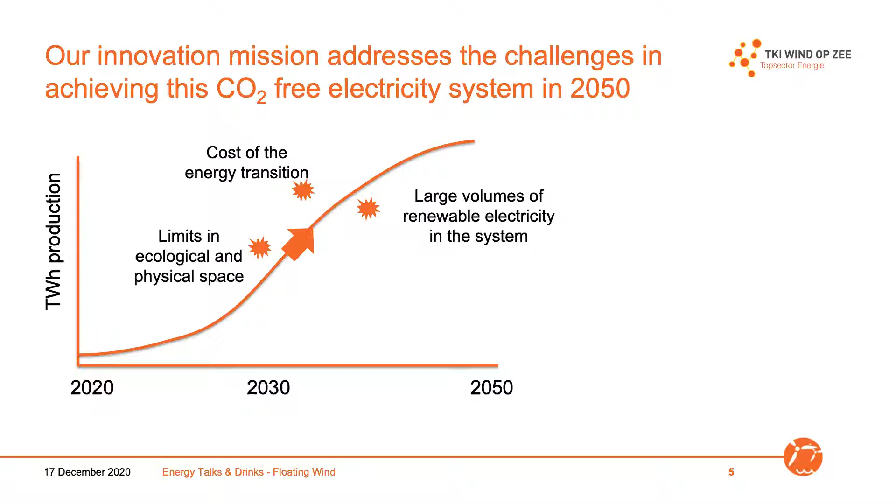A third area is, of course, space. Space is limited, both from an ecological viewpoint, but also from a usage viewpoint. So these three areas are the core of our innovation program. For all these three topics, we have separate innovation themes or subjects that we address. For tonight, the balance of plant, as we call it, is the relevant topic. For the Dutch energy transition, bottom fixed is a likely solution. It's available and cheap at the moment. But we also see for the longer term that new foundation concepts, including floating, also for shallower waters, could be a very interesting solution. It can also reduce, for example, the cost of installation, potentially also maintenance cost.

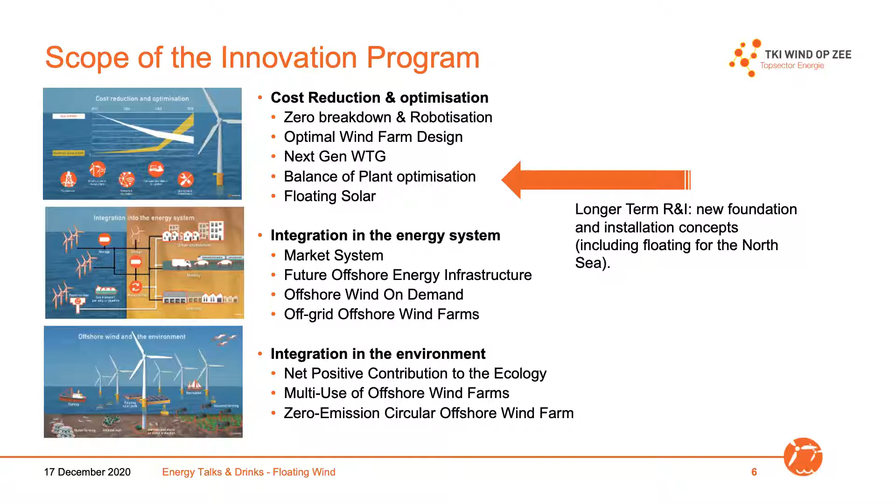So for the longer term, we see the perspective also of floating offshore wind in the North Sea. But of course, these are very shallow waters. Now, floating offshore wind is, of course, a much bigger subject than the Dutch energy transition.

What is it? 2 weeks ago, the European Commission launched their EU offshore renewable energy strategy, which includes a 300 gigawatt target for 2050 in offshore wind. But explicitly, floating offshore wind is mentioned as a key technology for areas like the Atlantic, the Mediterranean, but also the Black Sea. And I think we're very much encouraged by these statements from the European Commission that we are working towards these kind of targets.

So a mix of bottom fixed and floating offshore wind in the long run. But there's still a couple of steps to be set in that area before we come to a full scale up of floating offshore wind.

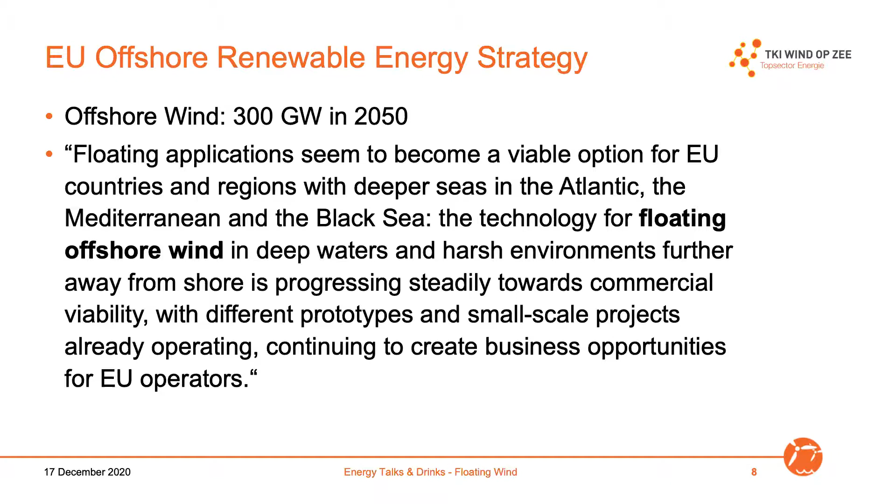Also part of that publication from the European Commission, this is the current situation. On the right-hand side, you see offshore wind, roughly 12 gigawatts of installed capacity at this moment, and 40 megawatts of floating offshore wind. But it is in the most promising stages of all the other technologies that also are on the roadmap for our energy transition.

And the last session for the Energy Talks and Drinks, we had about floating PV. So that is really starting to say in the lower TRL levels. But floating offshore wind, yeah, we have already projects operational right now. So we're way ahead there.

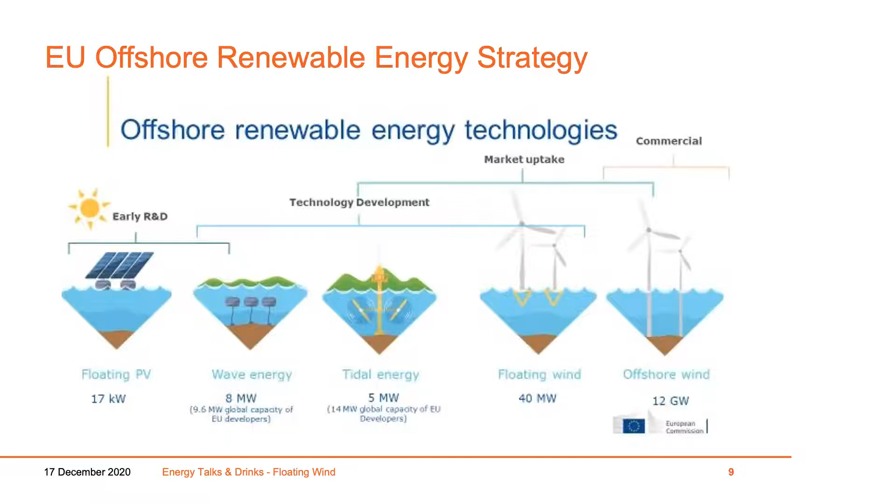So what I'd like to do now is to introduce to you Sarah Marshall, who's a principal engineer at Atkins, a well-known engineering company, and she'll say a few things about the challenges also for global offshore wind developments. Well, I'll stop sharing my screen and I'd like to hand over to Sarah.

Hello, everyone, and thank you for the introduction, Bob, and the kind words. Yeah, so I don't have any presentation slides for you. I just wanted to talk to you about the general opportunities and challenges associated with floating offshore wind.

So a bit of background about me. My background is in installation and transportation of these structures, and I've been working with floating offshore wind projects for the last 5 years and fixed offshore projects in the wind industry many years before that. And I'm really seeing the different challenges that we're getting between the different industries. And one of the things that I'm focusing on is actually changing the way we look at the design of the structures, because it's being driven much more by the installation criteria.

So Bob mentioned earlier about the applications in shallower waters, but going further out with greater energy yield in deeper waters. That's absolutely where we want to be going for the floating offshore wind capacity. But I also see there's a massive application in shallower water places, mainly because if you've got really challenging geological seabed conditions, you can actually install a floating offshore wind farm at a much reduced cost to a fixed structure. So there's opportunities for that.

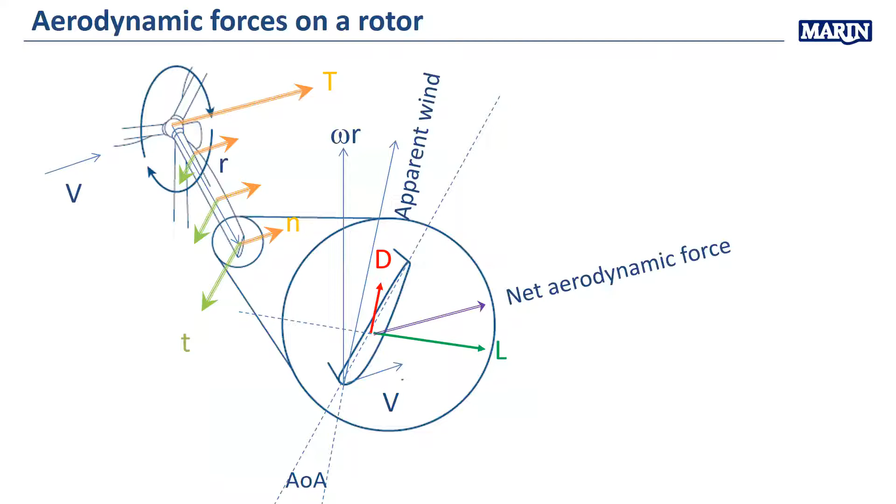if we think of a section of a blade, we are generating lift and drag forces, which are based on the composition of the incoming wind speed and the rotational speed of the blade. This is summed up along the blade, and we have a torque, which is useful for the generation of power, and a thrust. But this thrust needs to be taken into account in the overall dynamics, because it's really adding another character to the game. So floating offshore wind turbines are not like oil and gas platforms that are merely excited by waves, but we have to consider the dynamic contribution of wind.

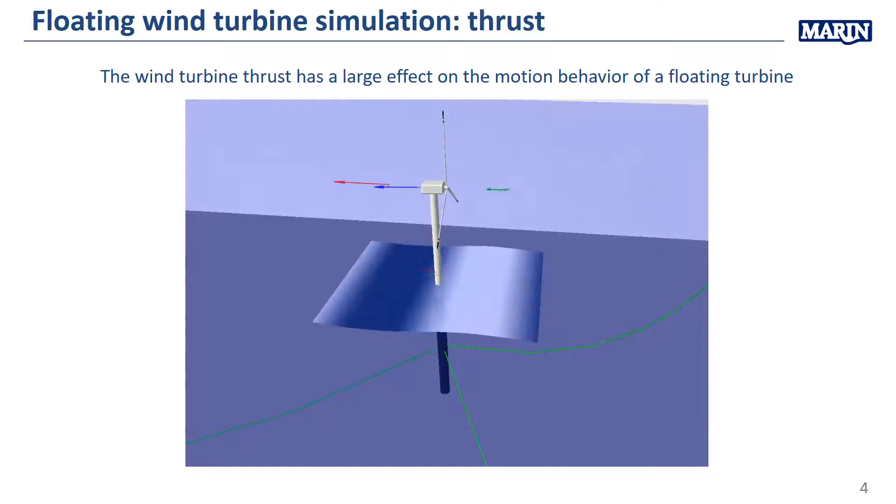And we can do that by developing and validating new numerical codes that need to include a lot of different and new challenges from an engineering and also an IT perspective. These codes are basically the tools that the offshore wind industry needs to base their design upon. But these codes need to be validated. And this can be validated in facilities like MARIN, which is at the top rank of facilities and institutes like this.

We have big facilities, big wave makers, and a big basin where we can reproduce the wind, but specifically wave conditions, and we can actually test scale models. So if you can see from this picture, basically what you have is a very tiny scale model, 1 to 50. This is the scale that is generally related to floating wind turbines, in a very huge facility.

I'm stressing this concept of the dimension of the facility, because this becomes really important when we also put wind in this facility, in order to have as little blockage effect as possible, and as little dependency as possible on the geometry surrounding the wind turbine model. We need very big spaces, and at MARIN, fortunately, we are in a very good position compared to other facilities to be able to create these conditions.

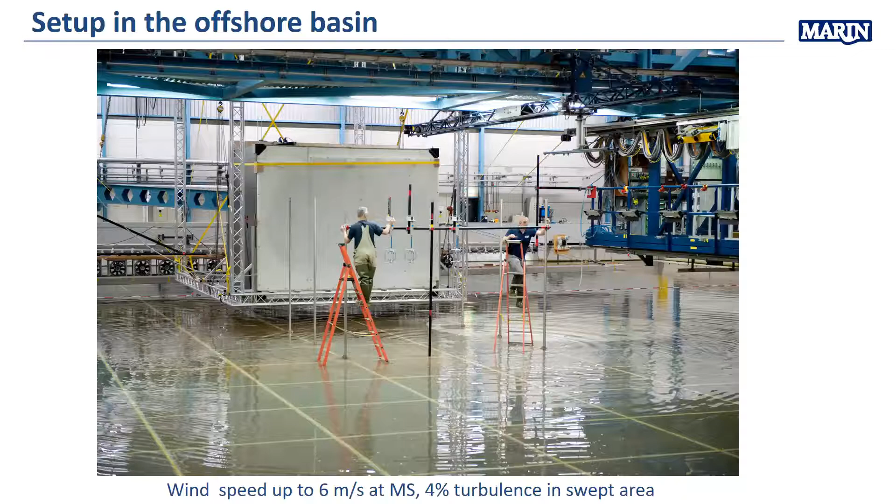Just to give you an example, here is a picture related to the installation and the wind calibration, because what we need to do beforehand, before putting the model into water, is making sure that the wind field is reproducing the characteristics of the wind site. The met-ocean conditions are basically the key point for us to build from scratch an effective test campaign. To do so, of course, waves need to be calibrated specifically and independently on the wind of the installation site, but also the quality of wind is a key point.

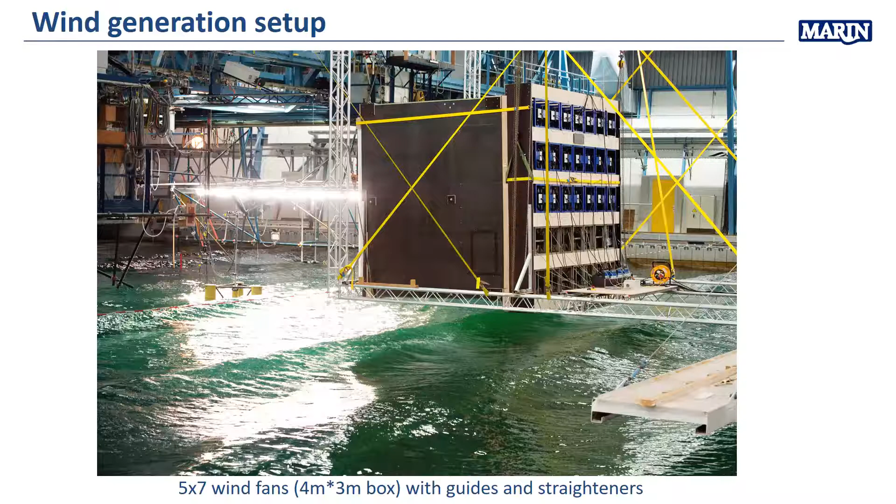And for doing that, we have developed this set of fans that allows us to basically have two different facilities in one: a high quality wind tunnel coupled with a high quality wave basin. And this, I have to admit, is quite unique in the world, and it's in the Netherlands.

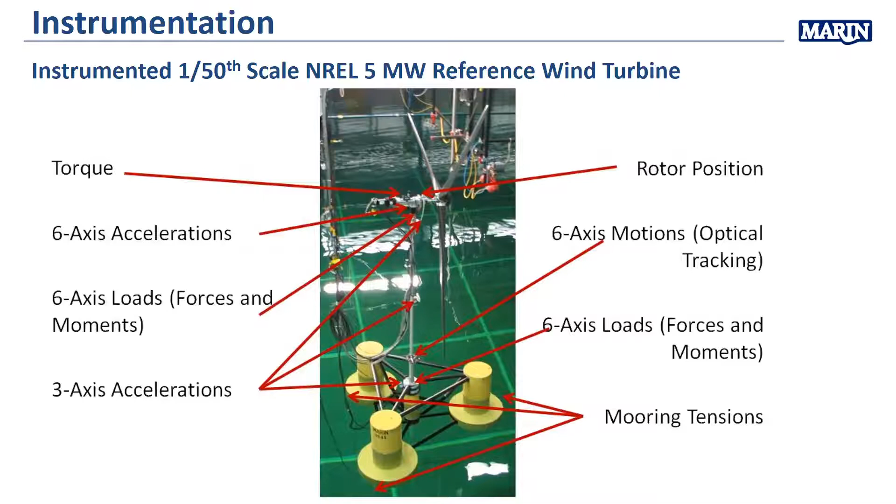And this is how it looks like. We want to put a lot of sensors, without going into details, sensors that allow us to gather measurements in operating conditions to validate the numerical codes that we have mentioned that are being used by industry. So we place force sensors, displacement sensors, accelerometers all over, or in a smart position, depending on what is the research question of the test campaign.

You can see here a close look at how a scale model of a wind turbine looks like. And I have to admit that at MARIN, fortunately, we have the engineering and manufacturing capability to produce quite high quality scale models of wind turbines, because it's key, especially if we consider how much influence the quality of the blade, which I'm going to talk about briefly, and the dynamics of the control system have, for example, on the overall dynamics of the platform.

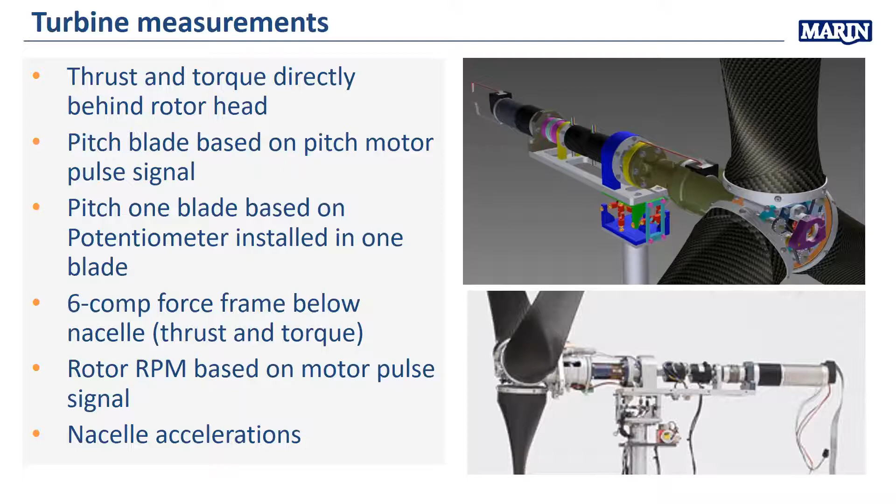Typically, our clients are oil and gas platform manufacturers that are going into floating wind, and this kind of campaign is useful for them to fine-tune their design in order to be aware of what are the stresses, the motions, the forces on the mooring system and on the platform itself, and the loading coming from the static and dynamic forces of the wind turbine are key in the overall design.

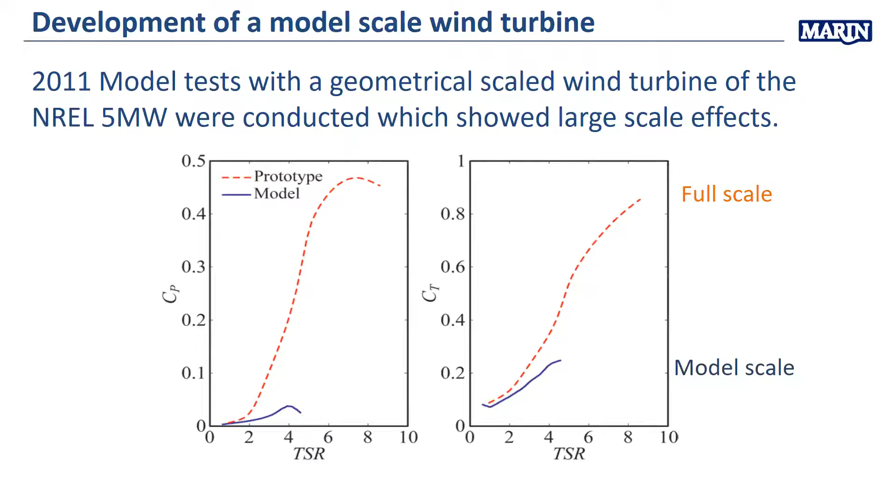But talking about this, it looks like a very simple task, but this is not the case. If we look at these two graphs, one might say, okay, you have the curves of the power and thrust coefficient that you want to reproduce at model scale, but they are actually quite different compared to the performance of the model scale. That is true, but only if we just scale down geometrically the wind turbine blade design. What you actually want to do is reproduce the same forces in a scaled manner.

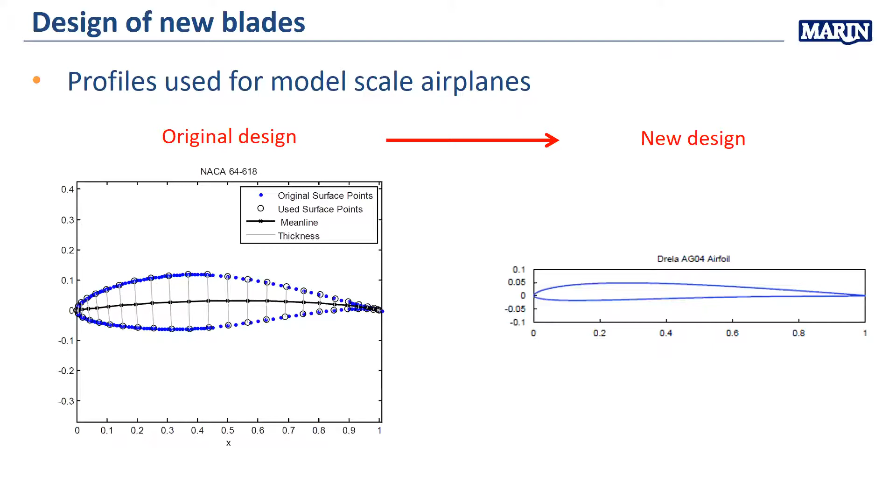So what you have to do is completely get rid of the full scale design, and redesign as if you were a wind turbine manufacturer, specifically for the scale model performance of your wind turbine. That's the only way that you can match the two curves. This sounds a little bit technical, but long story short, you have to reproduce some kind of equivalent design of the rotor at model scale in order to be able to reproduce the full scale performance.

And we can do that thanks to our long-lasting experience in propellers. In the end, a wind turbine is not that different from a propeller, and we can make use of numerical codes that have been validated for decades.

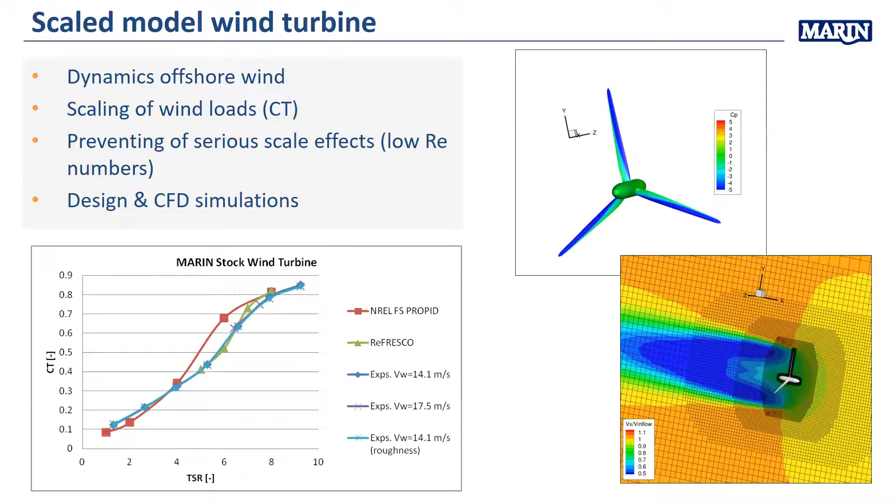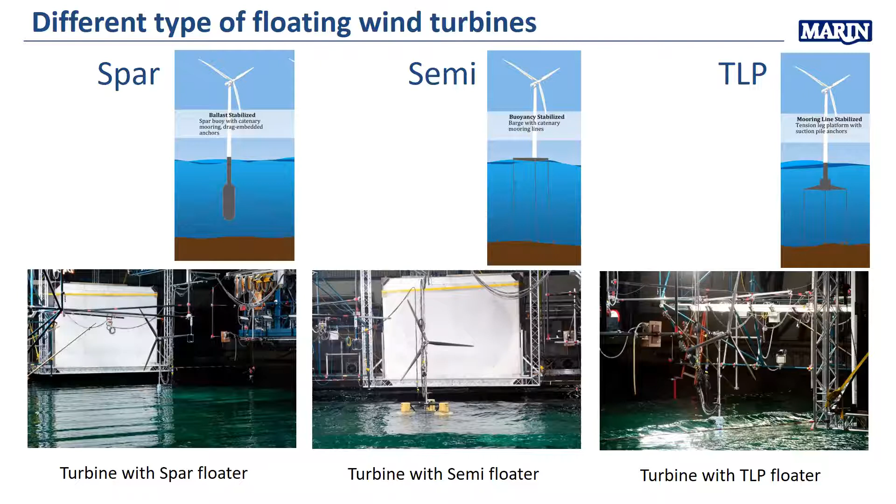So here in the oil and gas approach, let's say oil and gas manufacturers, they are designing their platform and they are trying to make that as cheap as possible. The other type of concept is considering from the very beginning of the design also the O&M and the transportation issues. So then, considering those constraints as inputs, you come up with some design that can look completely different compared to this type of concept.

We have been testing different concepts for more than one decade, and these are the typical testing campaign results of our previous experience. As you can see, these are different concepts for these different applications, and they show different behavior in almost comparable wave and wind loading conditions.

For example, just to mention one, the spar on the left is really acting like a pendulum. So it's rotating back and forth quite a lot without moving transversely too much. Whereas on the other side, you can see the TLP, which is very stiffly connected, and so it pitches really low compared to the other concept.

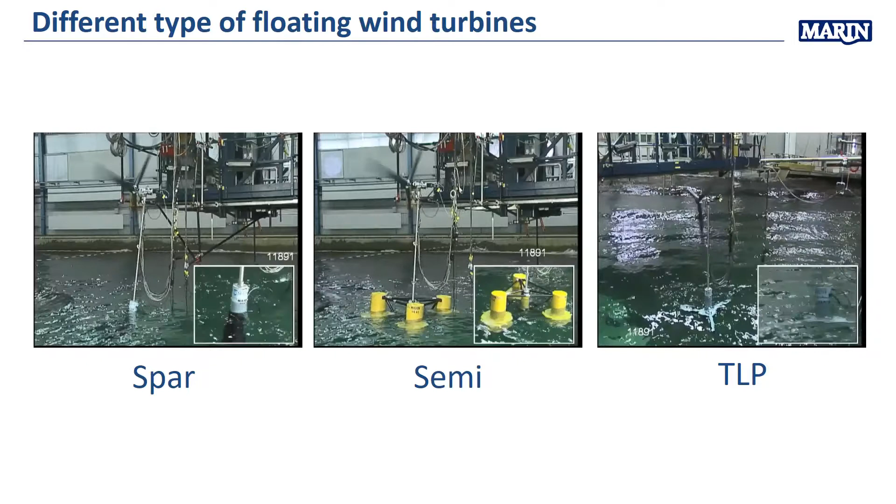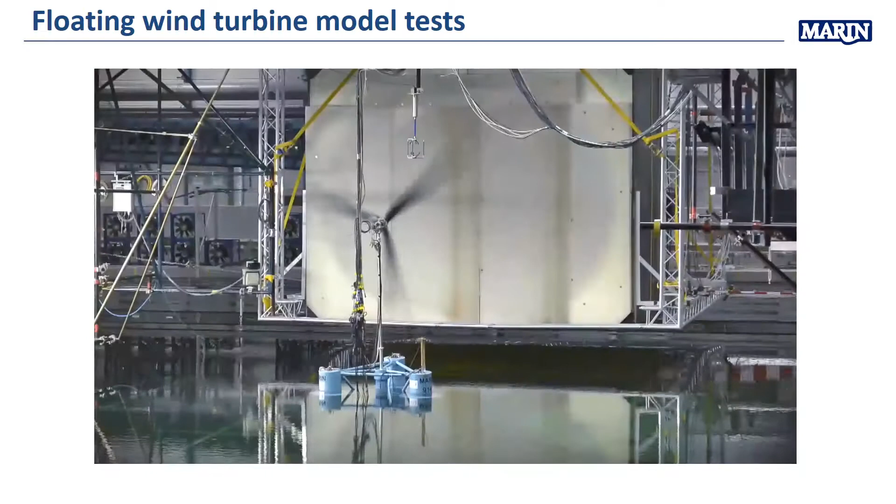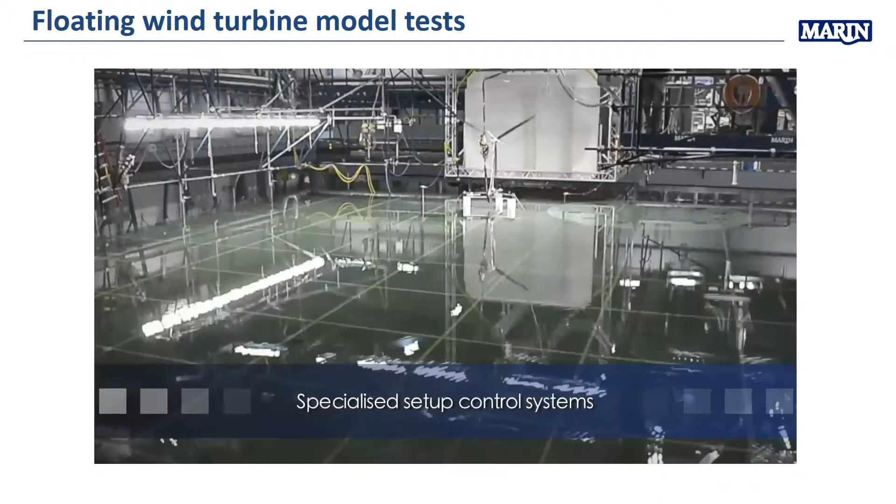This is a typical offshore basin experiment. This is a little bit promotional, but I think it can give the idea of what testing floating wind turbines looks like. From the control room, we are able to control everything that is related to the control of the wind turbine itself and the generation of the wind and the waves.

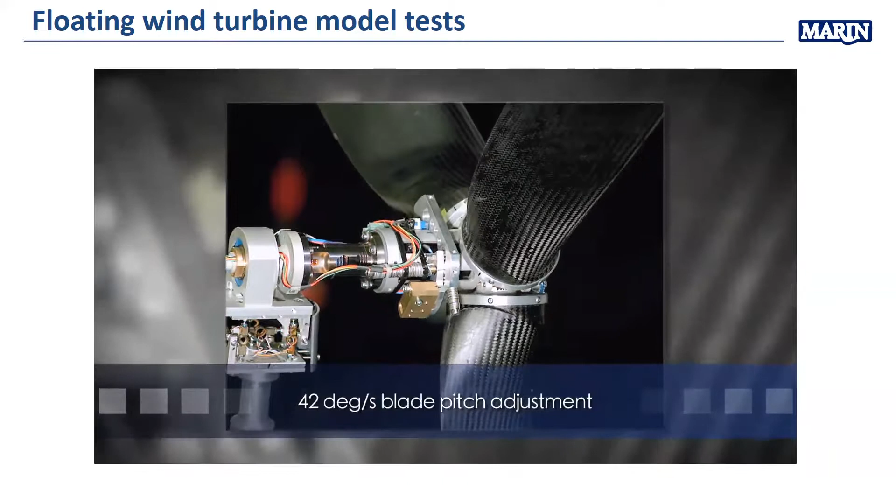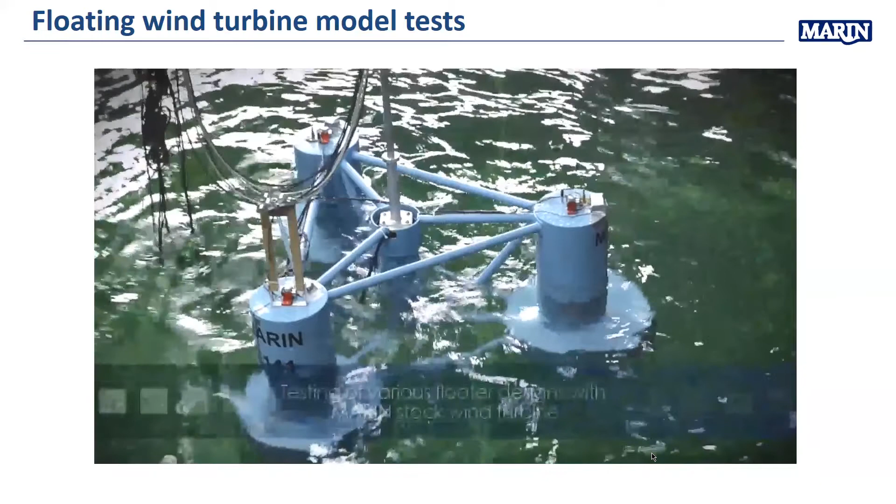And as you can see here, the mechanism behind the performance of the rotor is quite important for the overall performance, so we are able to dedicate quite some precision to details. It's almost done. Here we have a few concepts from a platform manufacturer that you might know. And just to give you an idea, the typical scale is 50.

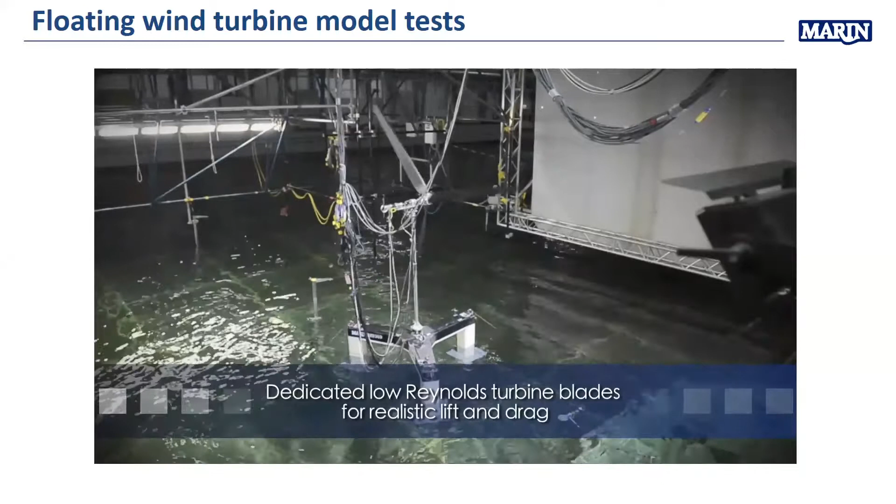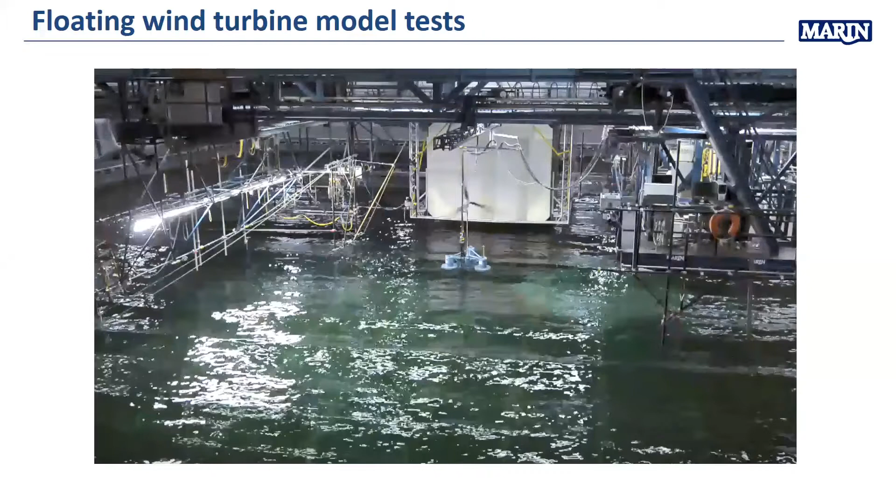So the Froude scaling, which is basically the way we are scaling down the forces and the motions, is more or less 1 to 7 for the wind velocity. So it means that we are actually able to reproduce up to more or less 6 meters per second in the basin, which means way beyond the cutoff of the wind turbine.

Just briefly, I want to show you the last update of our research. This can be considered as the research of the research. So we at MARIN are doing research in order to make the research of our clients most effective.

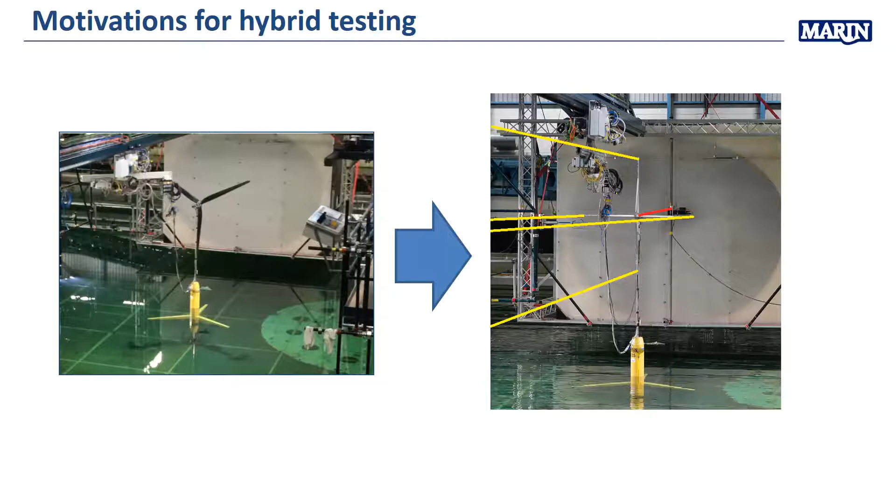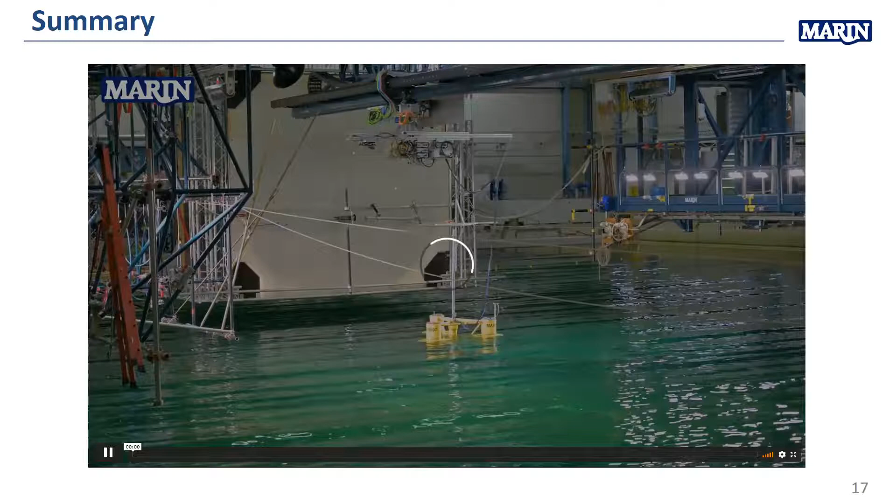And just this very final movie, which is a promotional one, but at least gives you the idea of the two different setups, with winches and with a physical rotor, that are available at MARIN, depending on the goal.

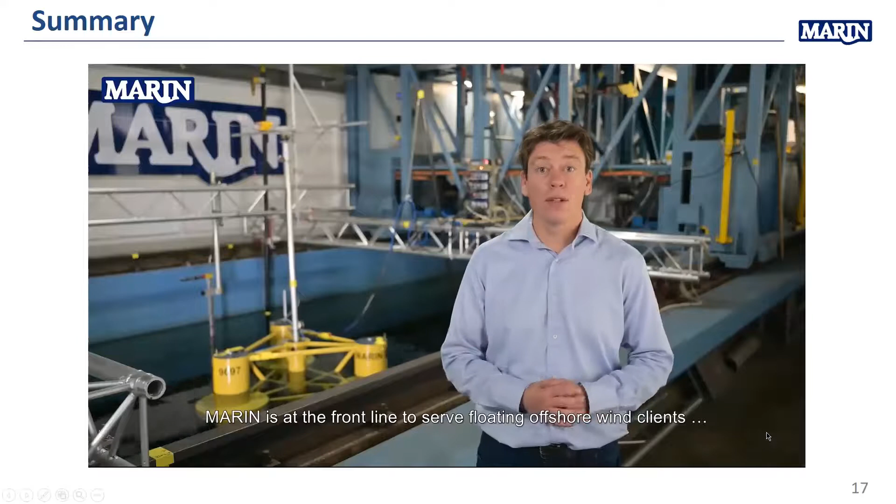As offshore wind energy is growing and moving into the ocean, MARIN is at the front line to serve floating offshore wind clients at key stages of the project life cycle, from concept to commercial operation.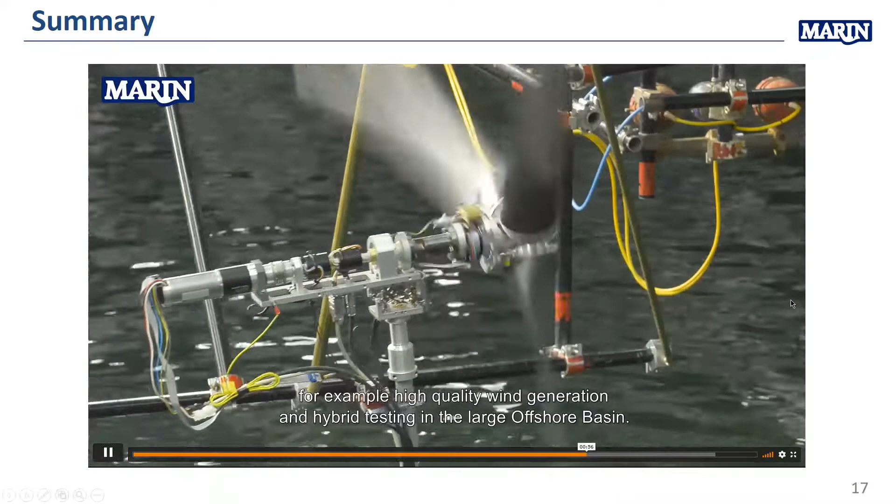Okay, that was a little bit promotional, but I think it was nice to see. Thanks, that was the end of my presentation. And just three quick remarks.

What I think is important is that model tests, as has been mentioned, are complementary, but also really important to be combined with simulations. At MARIN, we have capabilities to help our clients do both. And we always tell our clients that investing in a scale model test campaign reduces the risk quite a lot, optimizes the design, and in terms of cost it's absolutely not comparable with what can happen with the wrong design at sea. So feel free to reach out if you have any questions.

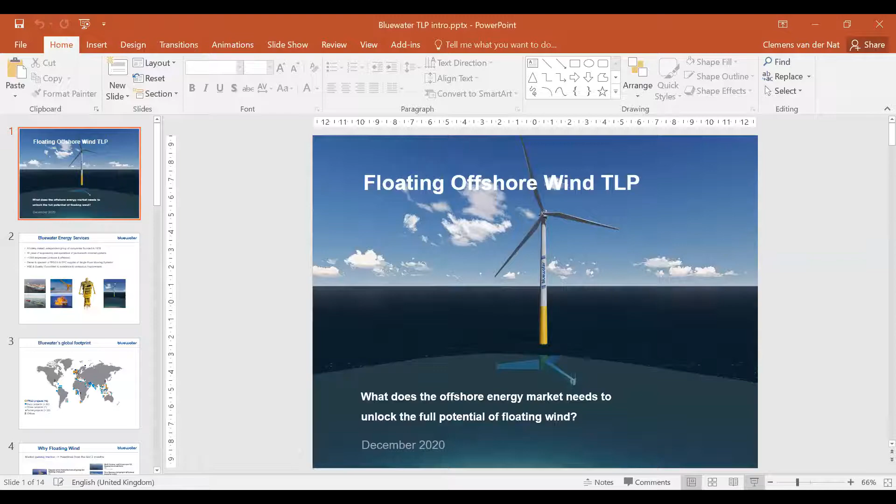Well, I will tell something about quite a different subject, where we see that there are needs for this new offshore market, needs that can unlock the potential of floating wind. Actually, the previous speakers were already talking a lot about the floating wind market, but our view on that market is different. So I hope it also gives some discussion with the previous speakers.

I liked seeing the motions of the TLP in the basin, which shows that they are very minimal compared to the others. That is certainly true. You also showed the hybrid testing in the basin with the winches from our TLP. It was necessary because the wind loads, even if the turbine is not spinning and you are offshore the northern part of Scotland, are so high that you cannot generate them with the wind machines. So you have to do that with the winches. So it was good to see that is necessary.

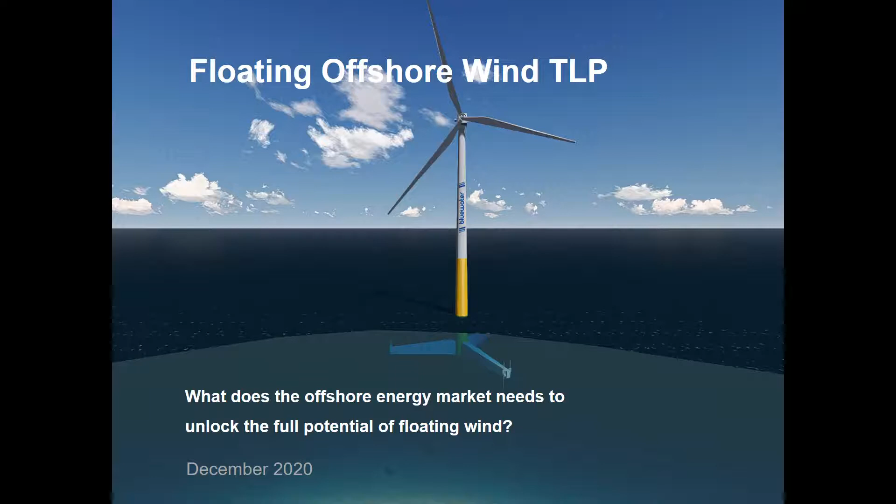Well, I will tell something else. I will go to the next slide. Just a little bit about Bluewater, where we're coming from. Not everyone may know that we are in the business of oil and gas. Our background is mooring of oil and gas facilities, big turret projects, also in the Arctic, and FPSOs. And for 5 years already, we have been working on floating wind.

It's been actually a challenge. There are a lot of challenges in floating wind. Not only, let's say, the numerical side, which has been discussed already a bit, but also the market for floating wind is quite challenging because you need to demonstrate in order to have an entry ticket. And that is a very expensive ticket because these demonstration projects are really expensive.

And that's also one of the reasons why I think there are very few demonstrators out there at the moment. And of course, all these people that have demonstrated want no one else in the market anymore. So they will tell everyone that demonstration has been done and that we have to move to the commercial side, which we of course agree with, but I think there are also other reasons why they say so.

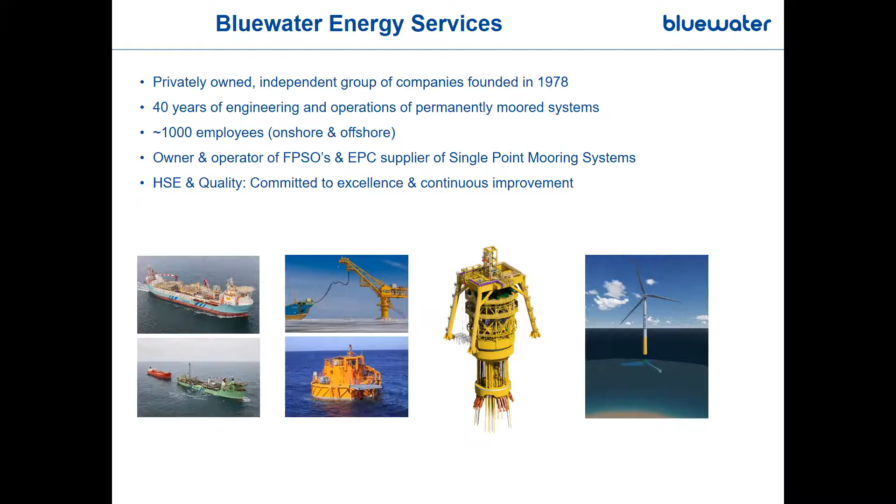Yeah, we are in the business of FPSOs, so we are in oil and gas, so you can find us everywhere oil is found. We have a big presence in the North Sea, especially in the UK sector of the North Sea, so we are quite familiar with the ScotWind outcome. In all these concessions of ScotWind, we actually have 3 of our FPSOs. So we are also quite familiar with the environment, and I can tell you it's harsh. It's a very harsh environment.

I think that even the demonstrators that are out there, which are mostly in very mild conditions, near the Canary Islands or in the Mediterranean, or even the ones in the North Sea in the UK sector, are quite sheltered by the UK itself. So if you go to the northern part of Scotland, the wave conditions and the wind conditions are quite different from the ones you see in the normal test sites that we have at the moment.

So yes, we are demonstrating. Yes, we are doing some things. There are small arrays, but I don't think that we are there. So there are a lot of challenges, also with respect to the technical part. Yes, and we also expect, of course, that there are projects in new areas for Bluewater. We will notice projects in the US. We have no presence there at the moment because in these areas no oil and gas has been found yet. We never know what happens in the future, but at the moment it's not. So that means we also have to expand our business to areas where we are normally not present.

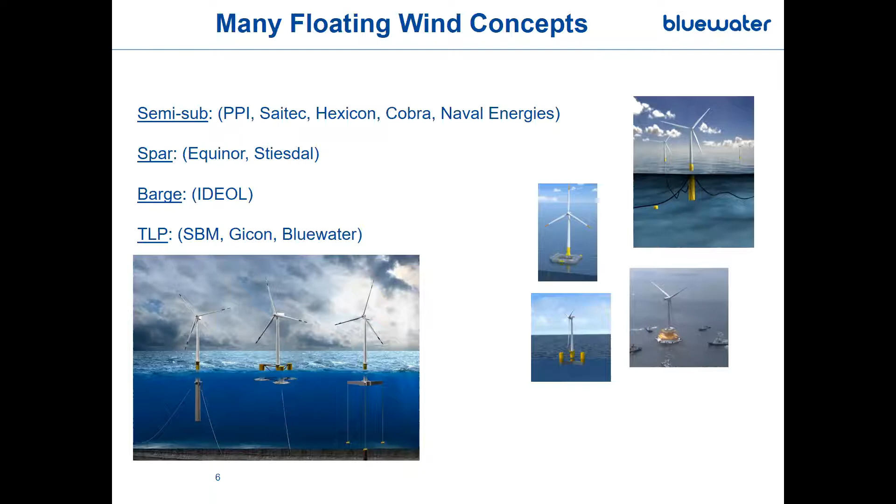What do all these structures have in common when you look at it? I think that in general you can state all these structures are huge. We show here some pictures of relatively small turbines on these structures, like 5 or 6 megawatt and on the top one an 8 megawatt. And still they are massive, and that's just a single unit. And don't forget, if we look at a farm, it's not a single unit. It will be 50 or 100 of these units.

So that is the real challenge, and that means that it has impact on fabrication. We discussed a little bit about it, but also on transport, installation, and don't forget the maintenance. They are not maintenance free. I heard something about taking these structures back into a port. Well, I can tell you that there are majors that are really thinking that that is not a good idea. It will take a lot of time and a lot of downtime of the unit. And also, what I show you later is that the tow itself is also a challenge.

So I think that the idea that it is cheaper to bring a unit into a port for maintenance and overhaul than doing the same activity offshore will probably not prove to be true at the end. It is of course mentioned a lot in floating wind as one of the key advantages, but no one has proven that it is true. So that will also be part of the exercise in the near future, where we'll notice whether that can be done or not, at least at reasonable price levels, or that we still see the same issues as with bottom fixed, where you have to do this maintenance offshore.

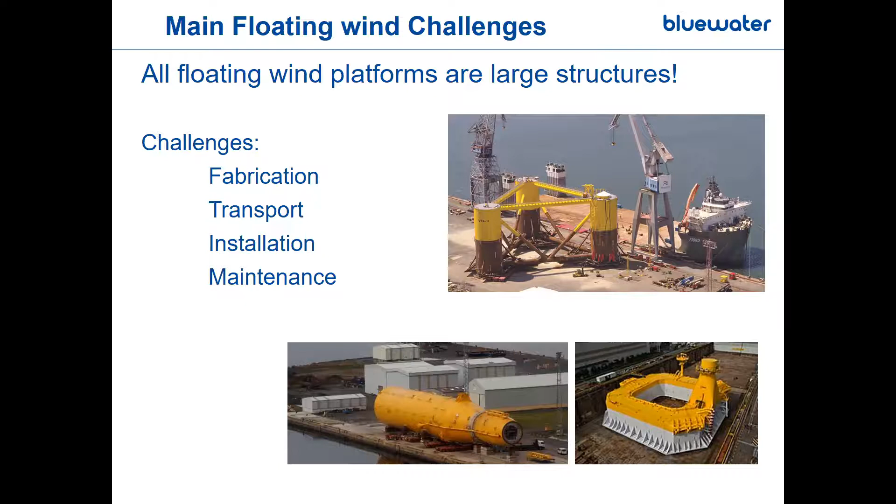So just some numbers. There are a lot of ambitions. Look at the ambitions of the EC and the UK. The UK is of course now not a part of the EC anymore. It's something like 17 gigawatt of installed floating wind power somewhere in 2030, which is a huge number. Don't forget, we have at the moment, I think, only around 12 gigawatt installed in bottom fixed. So it's a huge, huge number. But that's the ambition. We all can have ambitions.

I think you have noticed the Green Deal, where billions of euros will be invested in renewable energy. So yeah, the governments want to have it. And the governments are we, the people. So the people want to have it, and we are going to pay for it. It will not be for free.

That is for sure. But it also needs to be technically feasible. And if you look at 17 gigawatts of installed power, it means 1,500 floaters, each carrying the largest turbine ever, 12 megawatts, which is now in the port of Rotterdam. It's a huge turbine. And if you look at the amount of steel, it is about 7 million tons. It depends a bit on the concept. I'm thinking the semi-subs are on the 4 side, of course, and the spar will be on the 7 side. But it's a huge number, 7 million tons of steel.

Don't forget, if you look at Japan, they have about half of this number as the total fabricated steel of the whole shipbuilding and offshore building sector. So you need 2 times the capacity of Japan to make that happen. And in Europe, well, we are not so fond of steel fabrication only. We want to add value to shipbuilding steel by having installations and complex vessels. Well, this is just steel. This is a massive amount of just steel. There is nothing in there. It's just empty. It's steel. So you have to see that this is a big challenge for the world to make that happen,

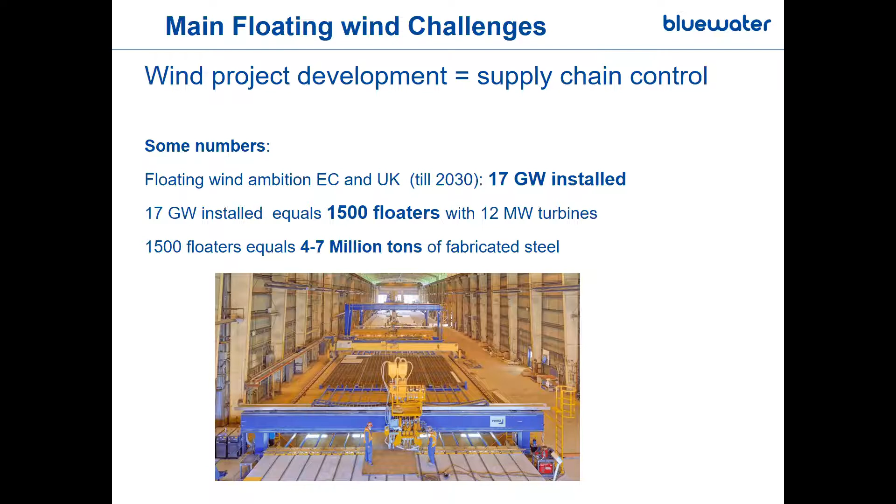and to Europe as well. These structures are not just simple rolled tubulars like we can see in the Netherlands and also in Poland and in the UK. They want to have factories that just make these tubulars, for example for the monopile industry, so that they can make them here in a fully automatic manner, which is quite competitive. So we don't have to bring these tubulars from China. But this is for floating. It's fabricated steel. It's panels. It's a lot of stiffeners inside. A lot of welding. A lot of things need to be there. Not complex ships, but just a lot of steel.

And well, in Europe at least, we are not outfitted. We don't have an outfit for large amounts of steel in a very cheap manner. We don't have the facilities at the moment. And if we want to build that 4 to 7 million tons of steel between now and 2030, then we need to do something. Unless we want to have it all built in China, or in Korea or in Japan, which I think, also from a transportation cost, because these structures also need to be transported, is maybe not the right way to go. So is there appetite in Europe to go back to the 80s, where we had these big shipyards and were able to build tankers, which are also just a lot of steel without a lot of equipment?

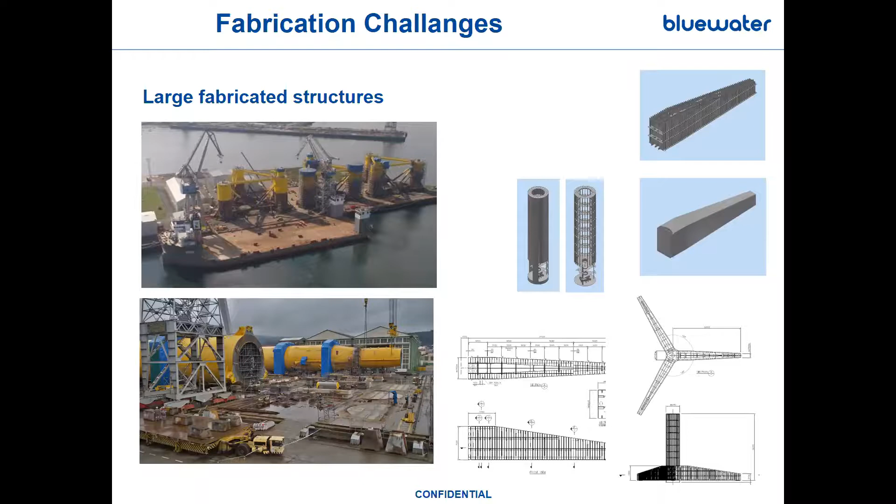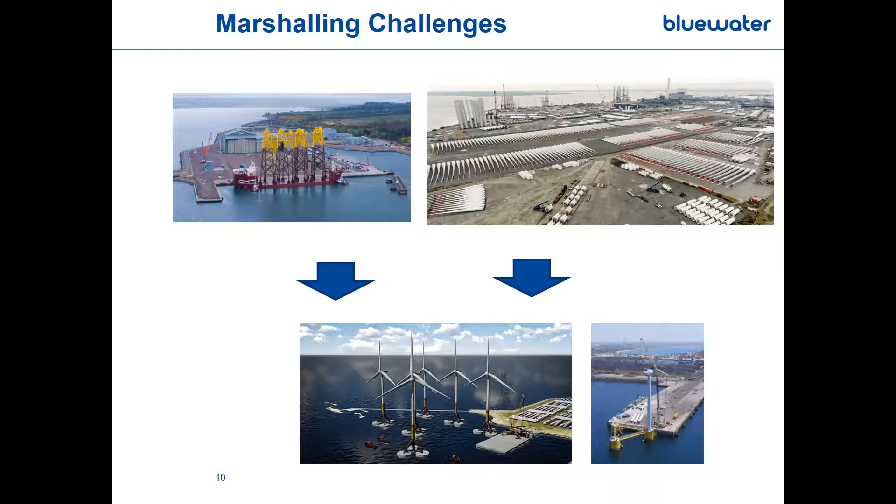The other big challenge that we see in floating wind is the marshalling. We talk about massive amounts of turbines and massive amounts of big structures that need to combine. If we do that in ports, then you need really big ports, because these structures are large and they take a lot of space. And if one of the supply chains, for example, the supply chain of the floater, is hindered, then you have a piling up of the other supply chain of the turbine, because they are together in one port. That's also one of the reasons why we have a strong opinion that you should not marshal all the components to one location.

And then the transport challenge. Everyone talks about tow for the floater. What we notice, and I think it's fair, is that weather has a big impact on tow. And it also means that if you do towing, you can have delays from weather, and they can be significant. We all know that the first array of the Principle Power floaters took quite a lot of time to install in the Atlantic last year.

And so what we see is that especially if you go to areas where there's a lot of wind, and we want to go there because that's the resource, there are also a lot of waves, and the weather downtime can be quite large. So you have to take that into account when you develop your technology, and make sure that the weather downtime is not hindering the development of your project.

So what we notice is the supply chain solution of bottom fixed, and we are very much fond of bottom fixed in Holland, because this industry has matured, and the cost per megawatt installed has gone down a lot, and we still see that there is room to improve. But one of the key aspects in that whole optimization is the supply chain optimization, where you have the installation of your foundations and the installation of your turbines being split. You have one season where you maybe install the foundations, and when the foundations are done and there is no delay possible for the turbines, then the turbines will be installed. And we are very much in favor of that.

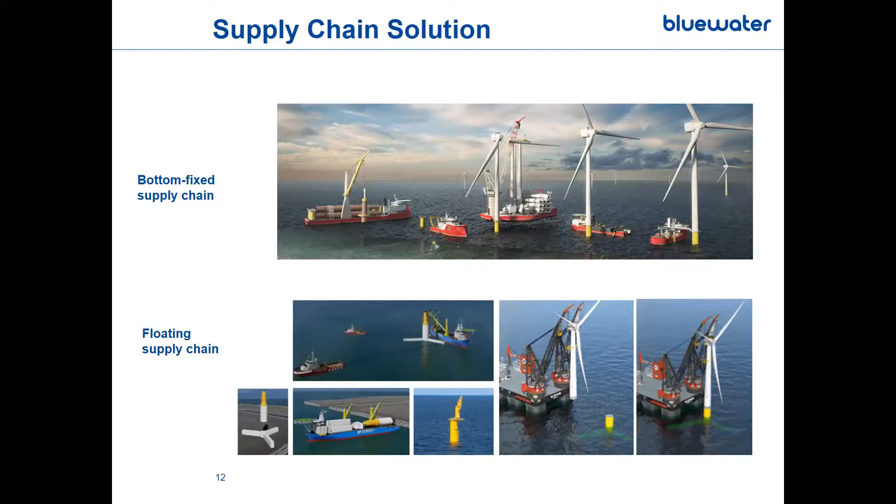And then, of course, we need innovative solutions for that. And we already notice that there are quite some innovative solutions in the Netherlands. We can see that Huisman is investing a lot in getting these turbines installed floating, but Heerema is also working on that, with slip joints for making this type of installation easier and more competitive. So yes, I think there is a lot of good news, but we also have to be realistic that we are at the start. We are certainly not in a mature market yet.

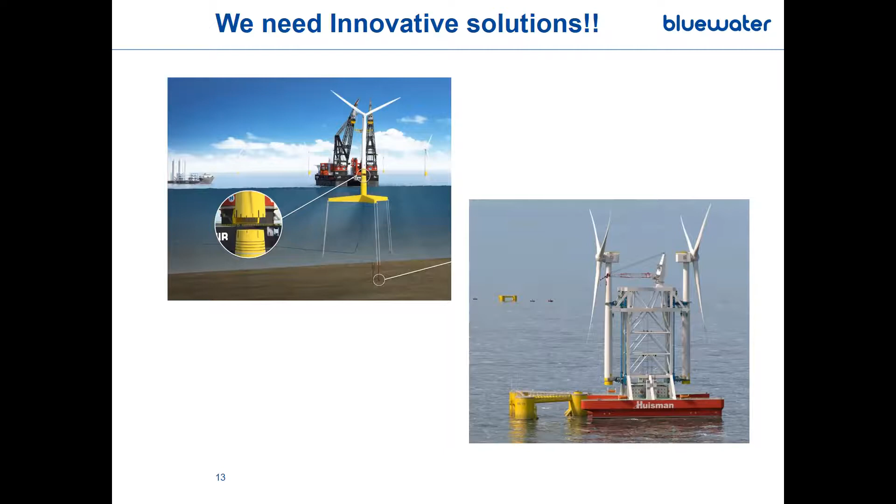Well, Clemens, thank you for a different viewpoint, I would say. Of course, we are all taken away by this enthusiasm and by all the high targets. But clearly, we also need to solve some issues here. And I think this is where innovation comes into play as well: innovative companies, supported maybe by universities and research institutes like MARIN, who could really help to find solutions for these challenges.

And I'm looking at the clock. We have another very interesting presentation waiting for us from Karel Rosen, who's the co-founder of Next Ocean, taking a completely different angle again, looking at waves and the impact of that on floating structures. So what I'd like to do now is park any time for discussion and questions, first take the presentation from Karel, and then see if we have time to follow up on the issues that you raised, Clemens. Thanks very much. Okay, no problem. So, Karel, if you can take over the screen and start your presentation.

Yes, thank you, Bob, for the introduction. I just shared my screen. I hope it's well visible for everyone.

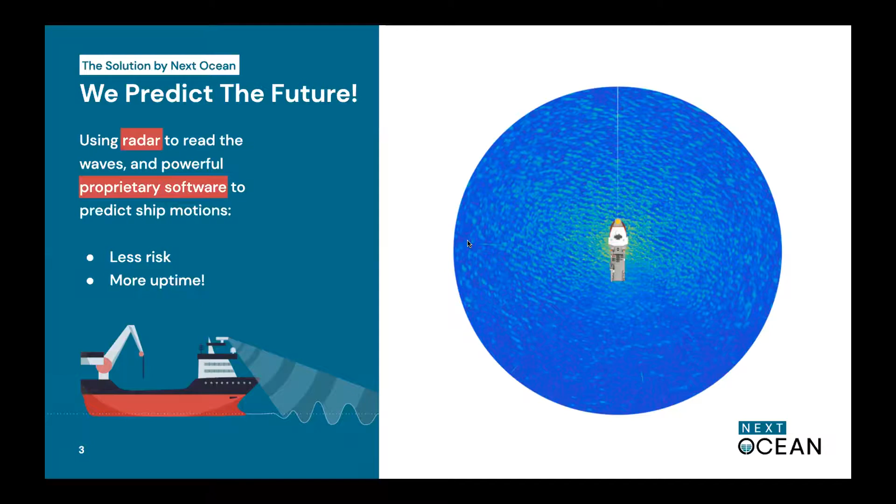Here on the left, you see again our interface, and in the top bar we see a now. This white line represents this moment, and all to the left of this is history. If we would judge the condition by this recent history, we would say we have one tiny motion limit crossing event, but in general it looks fairly calm. We could decide to start a critical operation at this very moment. Well, the wave predictor is capable of looking ahead of time, and suddenly we see that this is upcoming in 2 minutes from now.

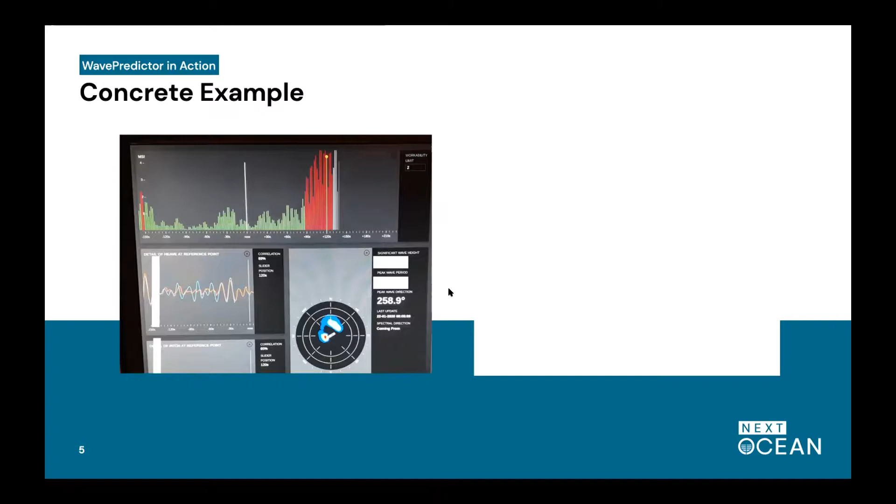These are literal screenshots. I just made photos of a live project somewhere out at the North Sea. If we look at how the interface looks a couple of minutes later, this event has passed. And if we see the monitoring graphs where we monitor the actual recorded motions, we also see that these predicted limit crossing motion events indeed occur. It was a very severe window.

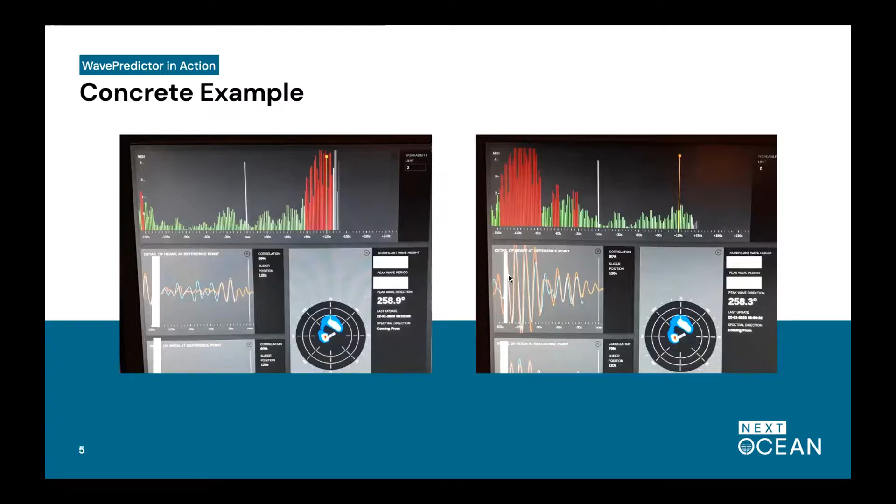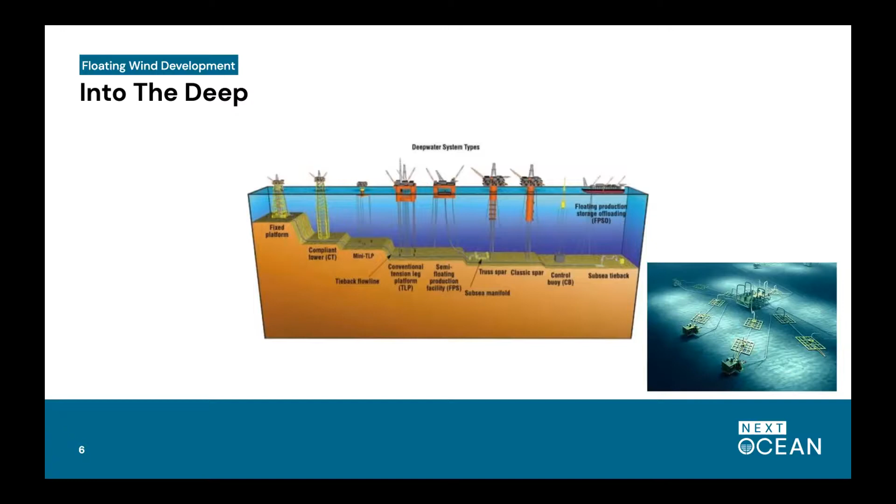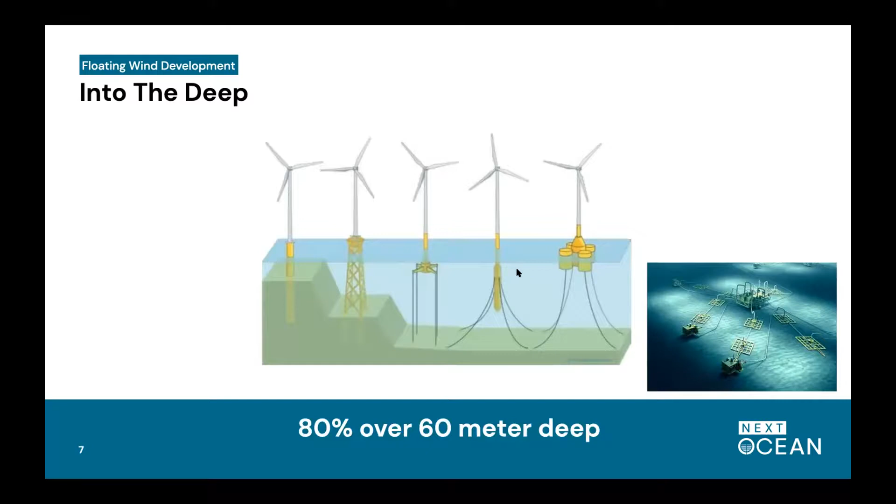I don't expect something similar to happen with floating wind, of course. We don't have too much to do subsea, but in floating wind we see the same kind of development. Here the end stage will probably be something more like these fancy concepts, which are under development currently, but we are still far away from that, obviously. Well, why is it interesting to think about this floating wind?

As far as I could find some facts on this, 80% of the interesting areas in the near coastline areas, where there's also a lot of cities situated, roughly 80% of this area is over 60 meters deep, which means that the bottom-founded structures get less cost-effective or even economically unfeasible.

Well, our technology helps actually over the whole range of offshore wind and offshore floating wind concepts. Because in general, by predicting the waves and by predicting motions, you can benefit from the technology that we developed both in the bottom-founded wind turbines as well as in the floating wind turbines.

Nevertheless, recently we also got involved in a project that was really more specifically focusing on floating wind. In this case, it is about a semi-submersible type of floating wind turbine, and that is the design by Ideol. It already appeared in some of the previous presentations. I think Clemens showed it.

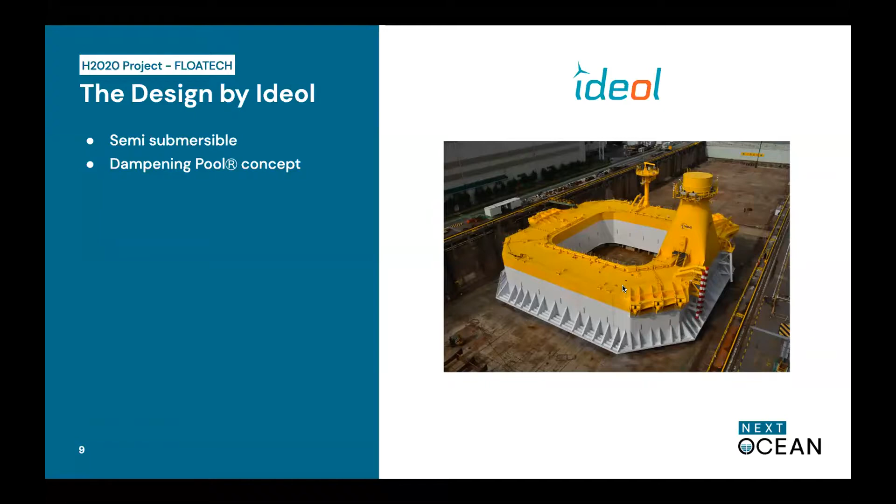So we ended up in a consortium that together applied for EU funding in the Horizon 2020 project, and it's called FLOATECH. So we are now one of this list of great companies to collaborate with, and we as Next Ocean also play a significant role in this project.

So what is the goal of this FLOATECH project? Well, in the end, the goal is to overall reduce uncertainties in the design process, and of course to increase the cost competitiveness of floating offshore wind. The main way this is foreseen to be done is to optimize certain design software. It's called QBlade, and this QBlade software can help to optimize the design of your offshore floating wind farm.

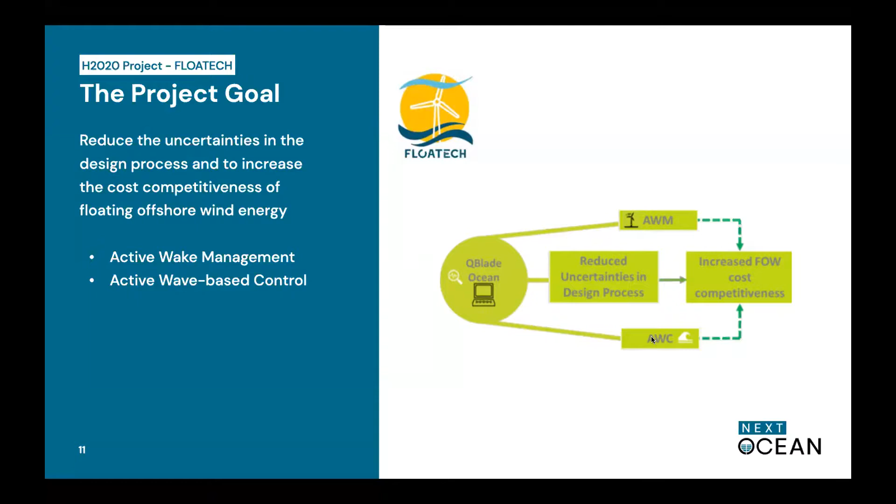Now that is for the design phase, but simultaneously they intend to use this software also during operation for both AWM and AWC. Now what does this stand for? AWM stands for Active Wake Management.

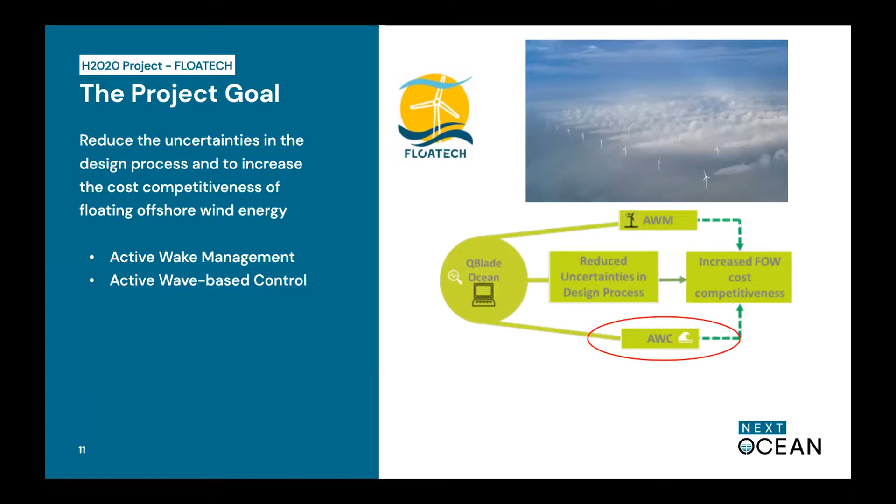But that's not where we come in. We come in on the AWC, which is an acronym for Active Wave-Based Control. So floating turbines, as you can imagine, can move in the waves, as opposed to bottom-founded structures that are stiffly connected to the bottom. The floating turbines can move.

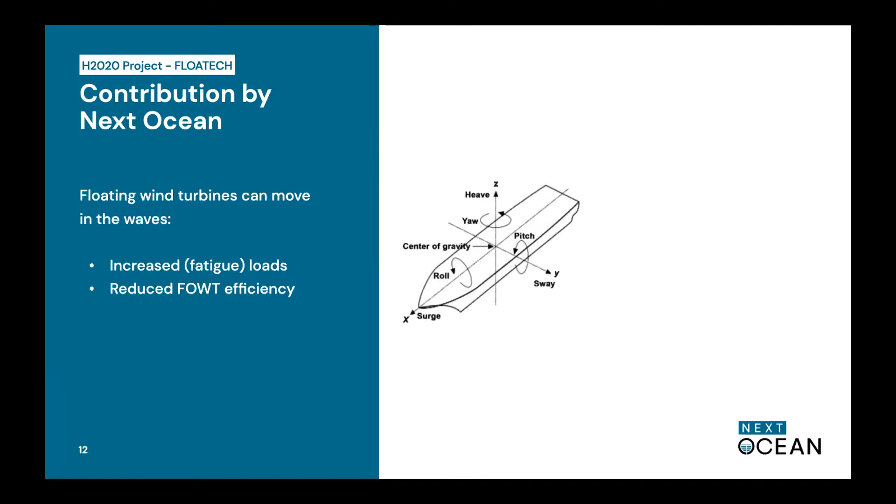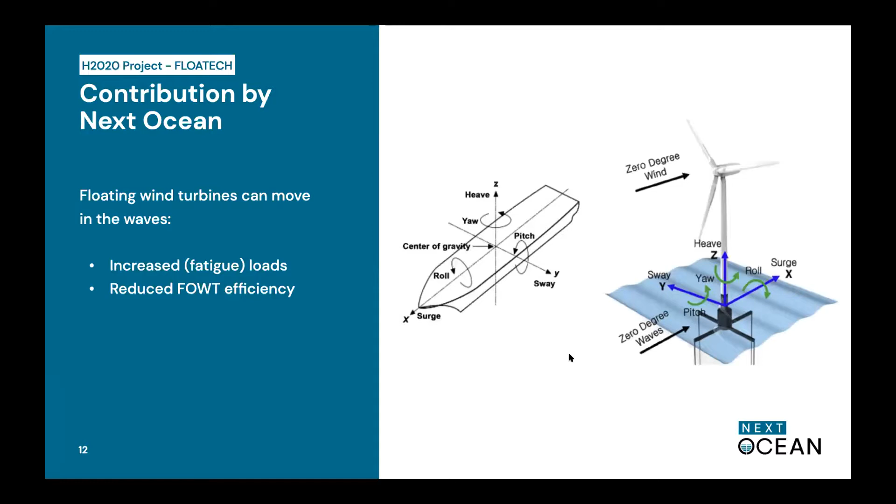I'm familiar with these kinds of plots where we can see that a ship can move in different degrees of freedom, the same way the floating offshore turbine can. And actually this is a problem because the movement of these turbines increases the fatigue loads and also reduces the overall efficiency of the turbine.

Now, one way to counteract these motions is by active blade pitch control. By changing the pitch, you can change the moment that is induced by the wind force on the turbine itself, and therewith you can control the position. This is already active in some floating offshore wind turbines, but it focuses mostly on the motions induced by the wind forces.

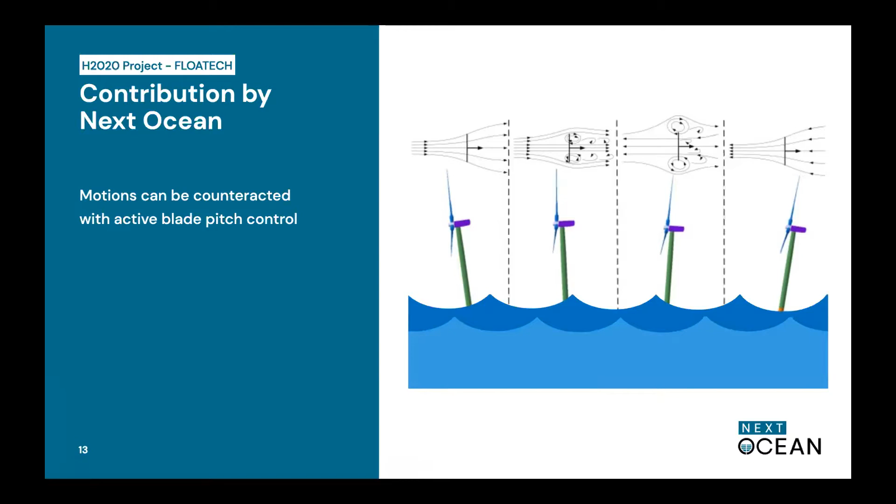On the other hand, of course, the waves also have a similar effect. The waves will also make these turbines move. And that is where we come in as Next Ocean with our wave predictor. We are contracted within this consortium to deliver one of our products for this Ideol turbine.

And what we try to achieve here is to see if it's possible by wave feed forward to reduce these fatigue loads, to use the active pitch control of the blades of the turbine to counteract the wave-induced motions, and at the same time also increase the efficiency of the turbine.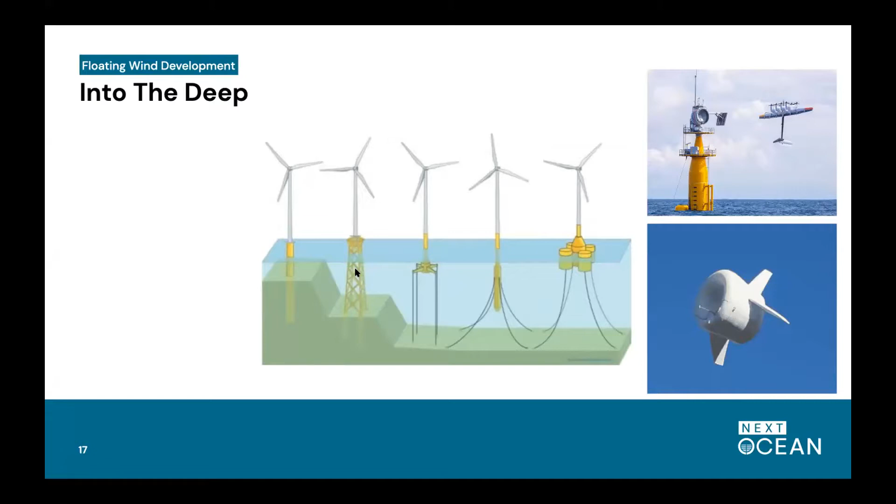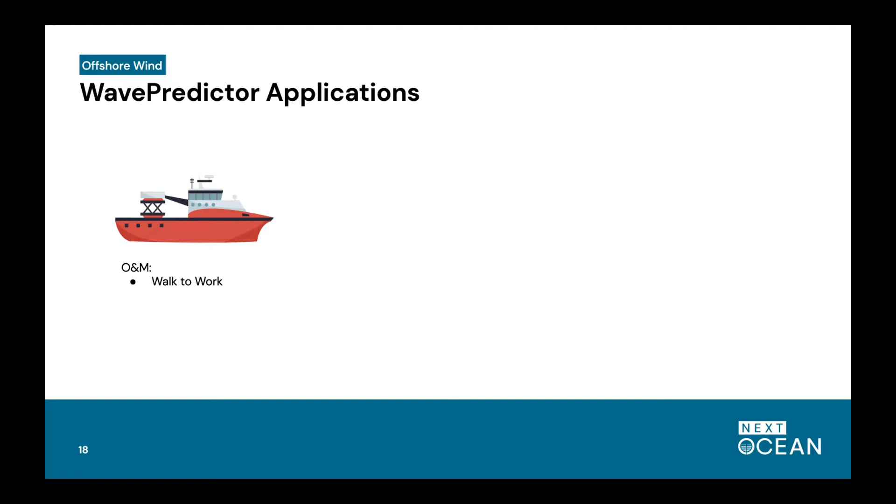Luckily for us, as I already mentioned earlier, our technology is also applicable on the bottom-founded type of offshore wind turbines. Also, these need to be installed and maintained in harsh offshore weather conditions. So to give some examples of these kind of operations where there's a critical short moment where you can benefit from the wave predictions and ship motion predictions, you can think of walk-to-work operations in the operation and maintenance phase, but also think about the installation phase where TP installations take place. There need to be trenchers launched and recovered for cable trenching, and also the feeder barge concept, which is upcoming.

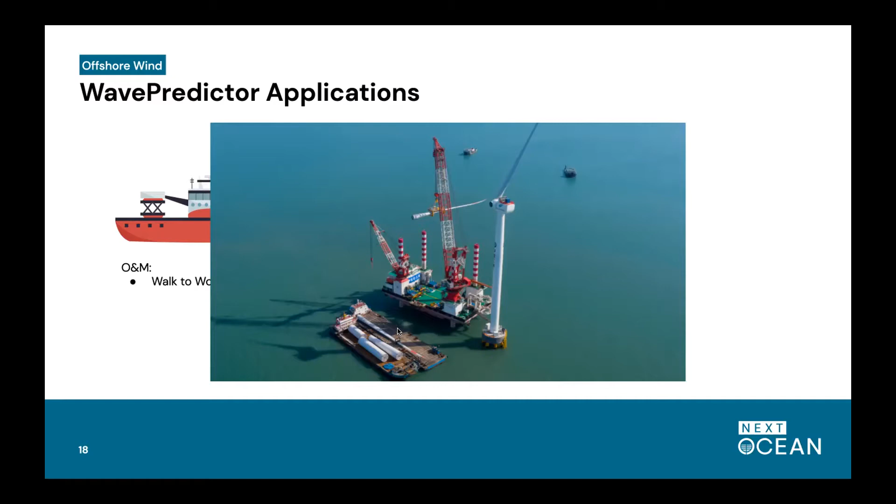And for those who are not familiar with this, the feeder barge concept works as follows. There is a jackup vessel that performs the actual installation of the turbine components, and because it's jacked out of the water, it is not influenced by the wave motions. But here, of course, the critical operation becomes the loading, or picking up the components that are fed to this jackup vessel by the feeder barges, because these feeder barges are actually subjected to the waves. Now, last but not least, even pre-installation, you can think about survey works where there's also ROV launch and recovery operations taking place in harsh weather conditions.

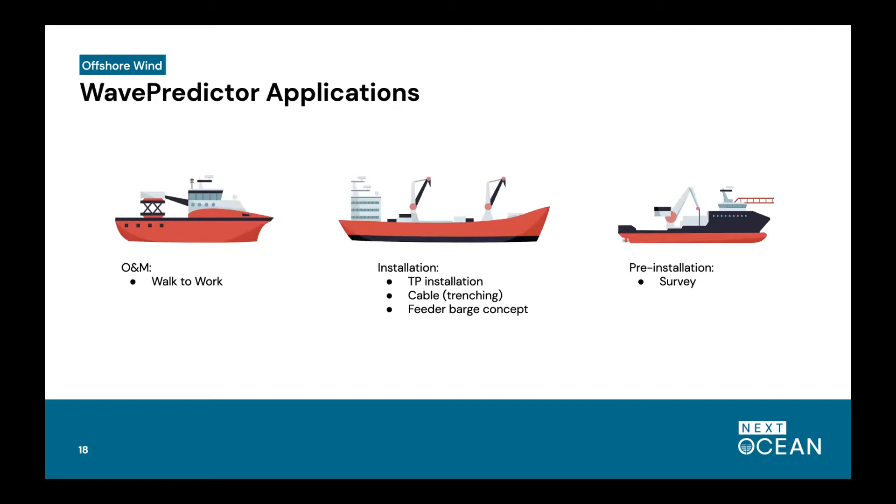We have done quite some projects so far, and we also made some videos about these. I will not show all of them, you can find them on YouTube, but there's one in particular, the latest one, which is really about offshore wind. It's not floating though, but still I would like to show you this video just to get an idea of how this technology works.

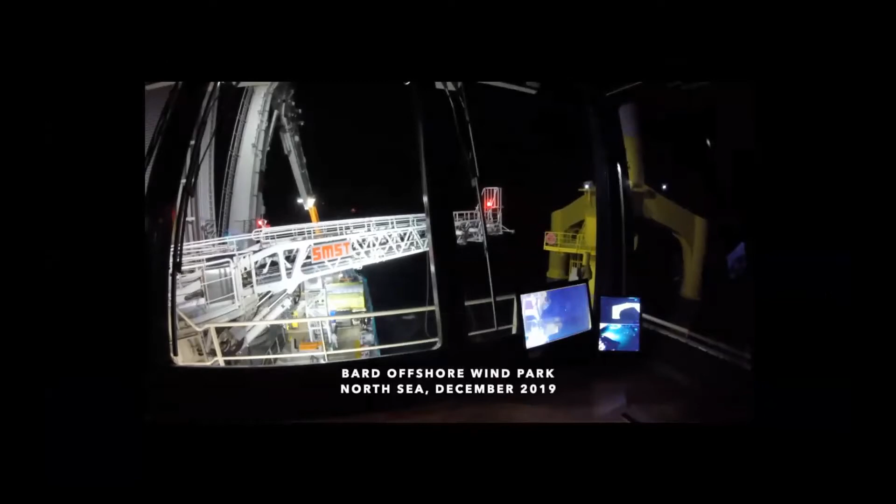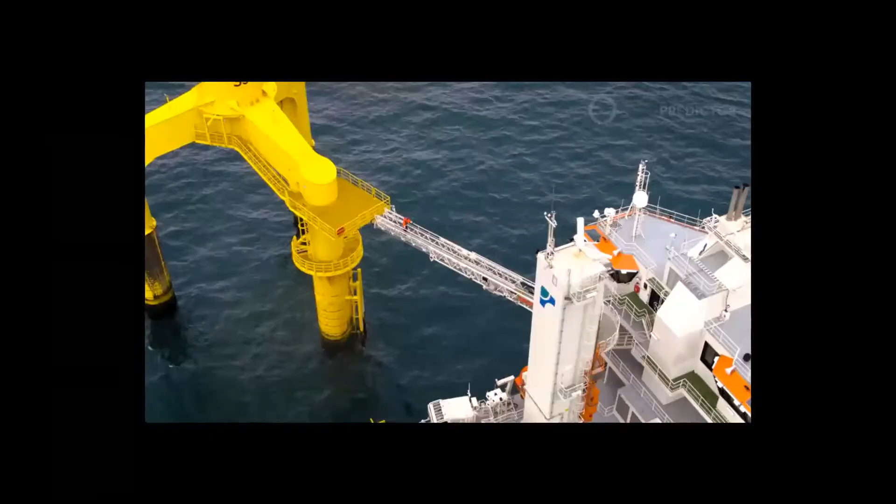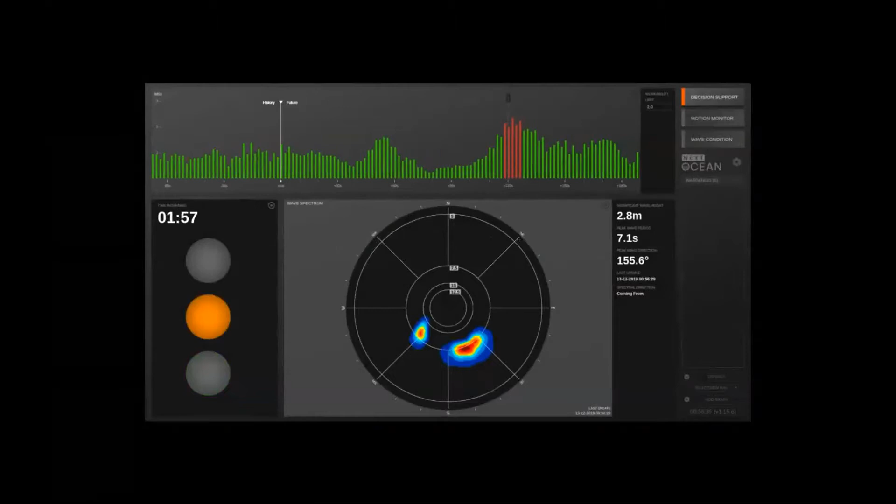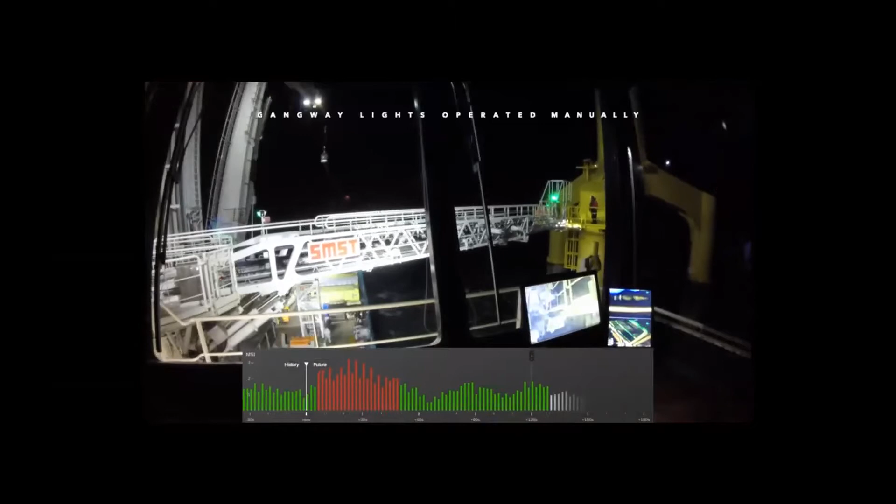So this project took place in December 2019. And we have been active with our technology on the Acta Auriga from Acta Marine. Here you see the interface, but then live. So you see actually the predictions scrolling from future to the history. And in the next shots, you will see some predicted severe motions also actually taking place when they hit this now line. And as soon as the graph shows that the severe motions have passed, the ship also stops moving almost.

Well, Karel, that was absolutely fascinating to see how this technology can also add to safety and increasing workability, and that you found an application actually in floating offshore wind.